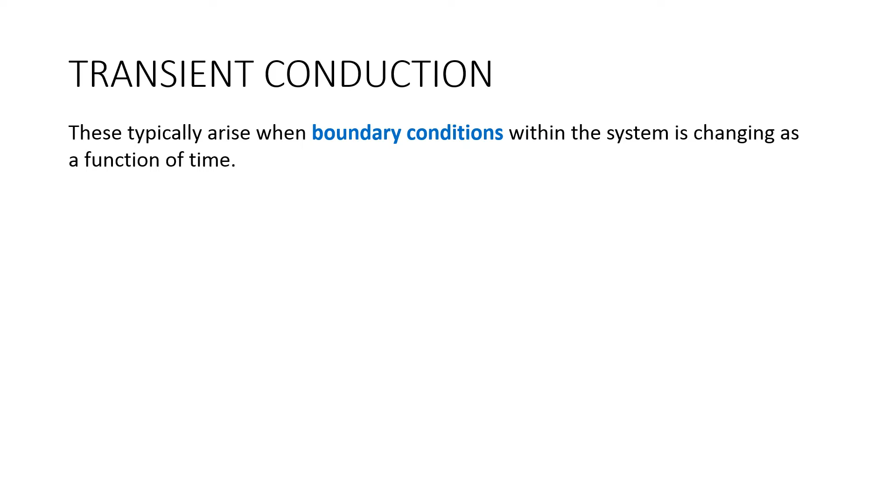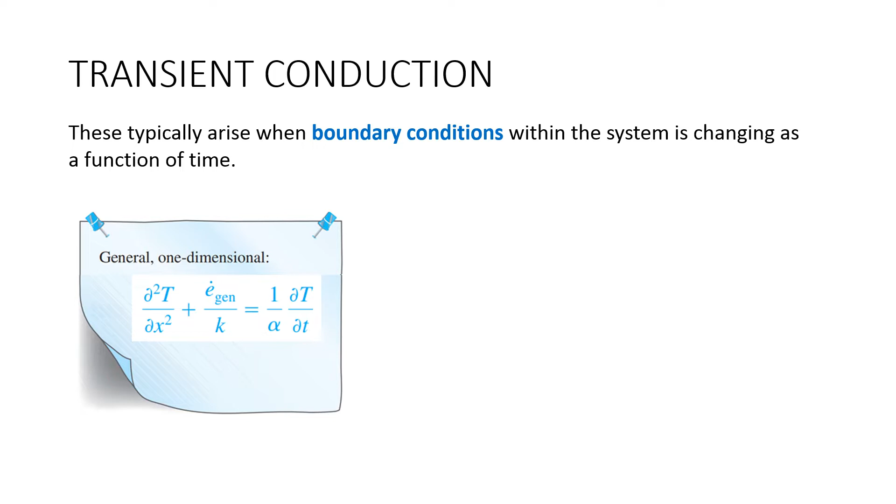In transient heat conduction, time becomes one of the variables in our solution. This typically arises when boundary conditions within the system change as a function of time. This is the heat equation for one-dimensional constant properties. If we could solve this equation, we will get temperature as a function of x and time. But it's rather difficult to solve this equation when time becomes one of the variables.

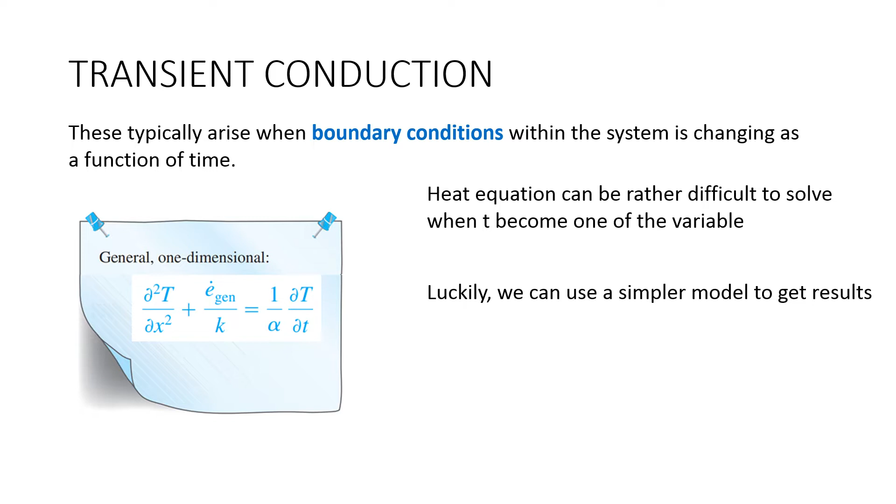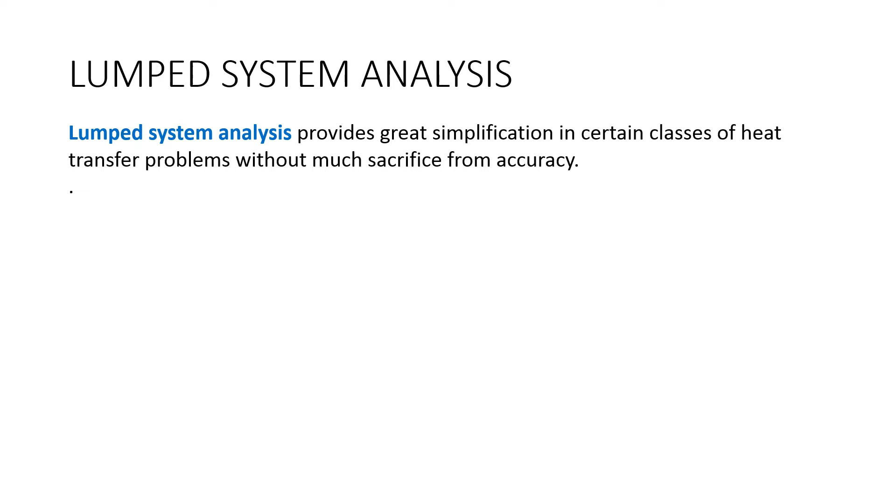Luckily, we have a simpler model to get the same result out of this equation. This is called the lumped heat capacity model. It is used in lumped system analysis, which provides great simplification in certain classes of heat transfer problems without much sacrifice from accuracy.

Now let's consider a body of arbitrary shape of mass m, volume V, surface area A subscript s, density ρ, and specific heat capacity C subscript p, initially at a uniform temperature of T subscript i.

At time t equals 0, the body is placed into a medium at temperature T ambient, and heat transfer takes place between the body and its environment with a heat transfer coefficient h.

For the sake of discussion, we assume that T infinity is greater than Ti, but the analysis is equally valid for the opposite case. We assume lumped system analysis to be applicable so that the temperature remains uniform within the body at all times and changes with only time.

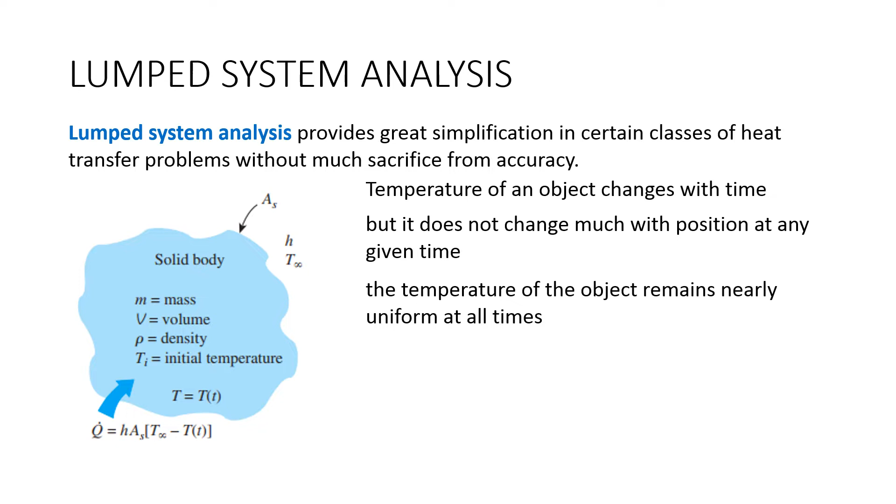So we know that the temperature of the object does not vary at any position, but it only varies with time.

And now we are not going to solve the differential equation, but instead we're going to write the energy balance for the object, which will look like this, as we have learned before in the previous chapter.

So we know that there is no heat transfer out of the body and there is no heat generated within the body.

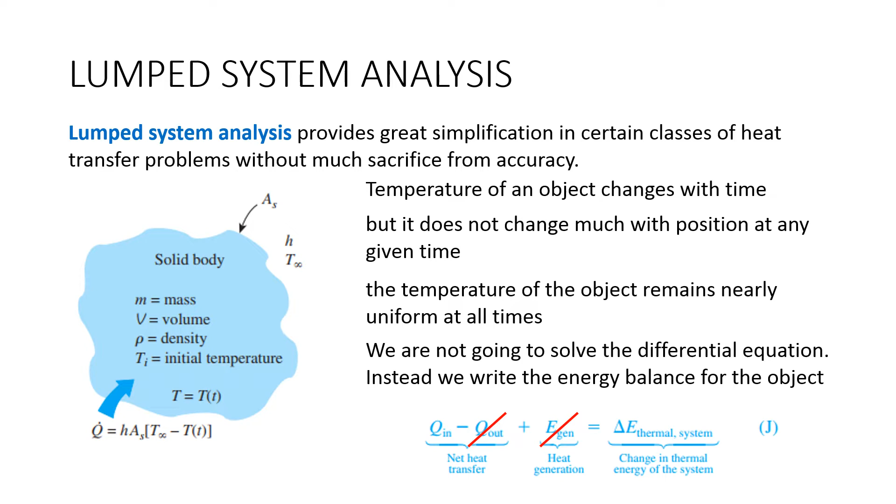So within the differential time interval dt, the temperature of the body rises by a differential amount. The energy balance of the solid for the time interval dt can be expressed as: heat transfer into the body during dt equals the increase in the energy of the body during dt.

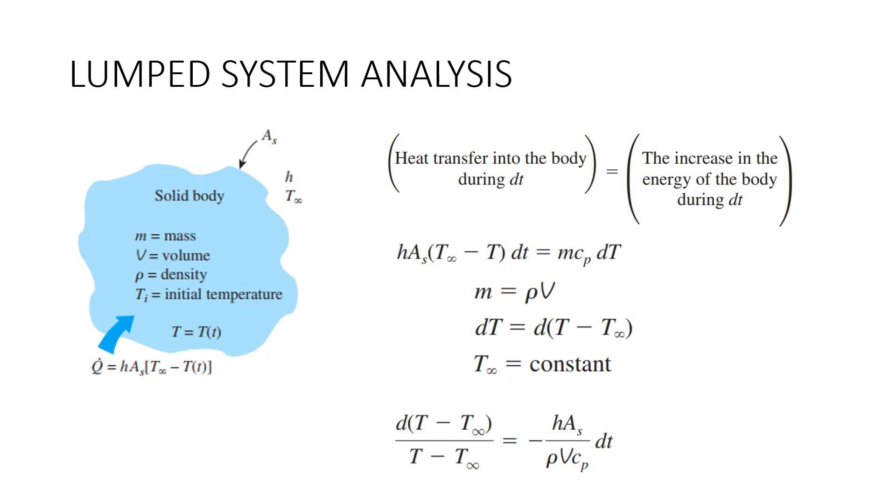In terms of equation: h As (T ambient minus T) dt equals m cp dT. We know that m equals ρV, and dT equals d(T minus T ambient), since T ambient is constant. Now we can rearrange the equation to become like this.

Now, if we integrate this equation from t equals 0, at which T equals Ti, to any time at which T equals Tt, it will give: ln[(Tt minus T ambient)/(Ti minus T ambient)] equals minus hAs/(ρVcp) times t.

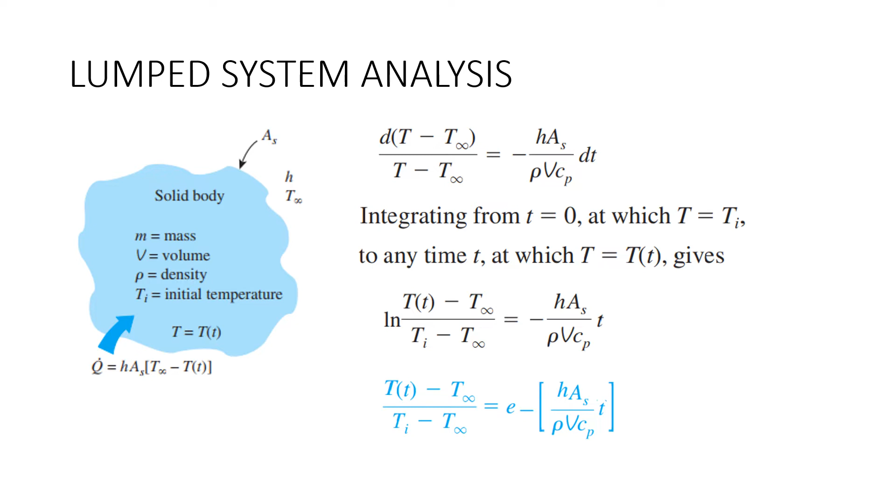Taking the exponential of both sides, we get: (Tt minus T ambient)/(Ti minus T ambient) equals exponential of minus hAs/(ρVcp) times t. And now we have this solution.

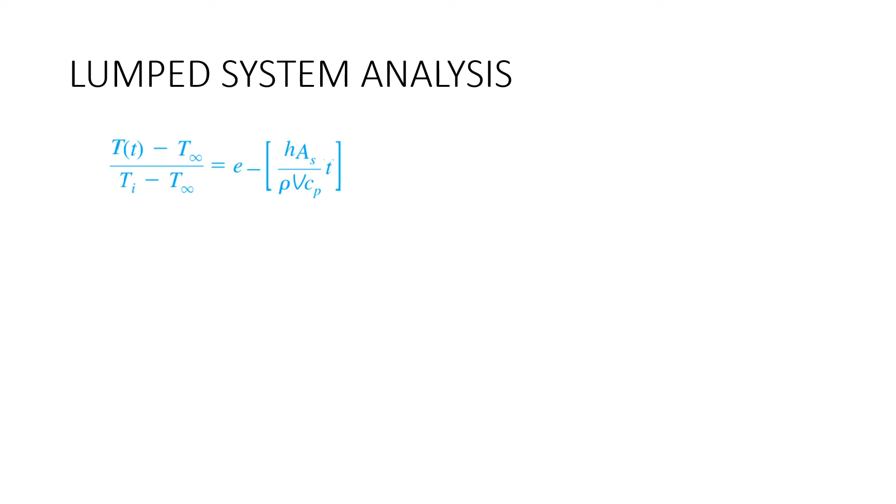What we can learn from this solution is that it enables us to determine the temperature of a body at time t, or alternatively the time t required for the temperature to reach a specified value. The temperature of a body approaches the ambient temperature exponentially.

Once the temperature at time t is available, the rate of convection heat transfer between the body and its environment at that time can be determined from Newton's law of cooling.

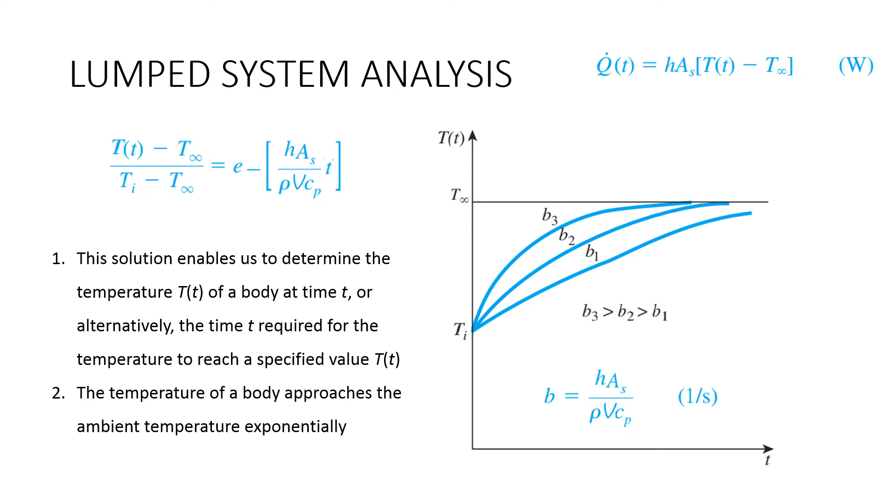The total amount of heat transfer between the body and the surrounding medium over the time interval t equals 0 to t is simply the change in the energy content of the body.

The amount of heat transfer reaches its upper limit when the body reaches the surrounding temperature. Therefore, the maximum heat transfer between the body and its surroundings can be calculated from this equation.

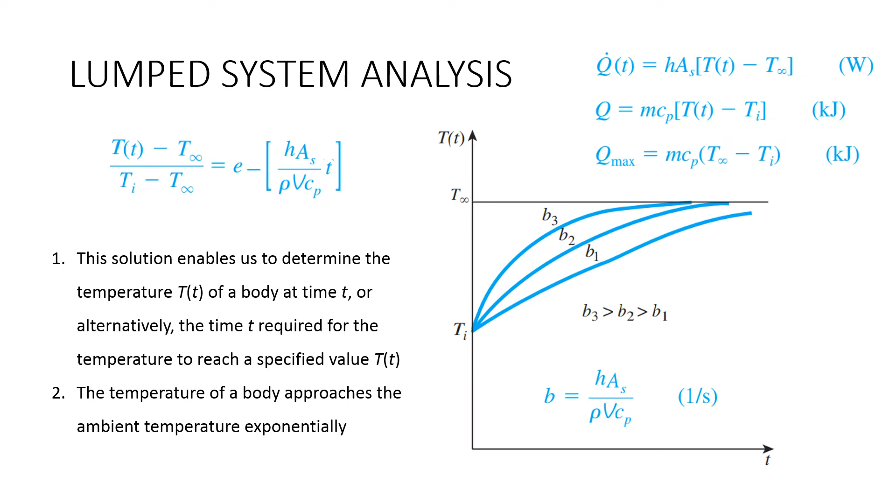However, lumped system analysis is not applicable all of the time. The lumped heat capacity model can only be used when a dimensionless number called the Biot number is less than 0.10.

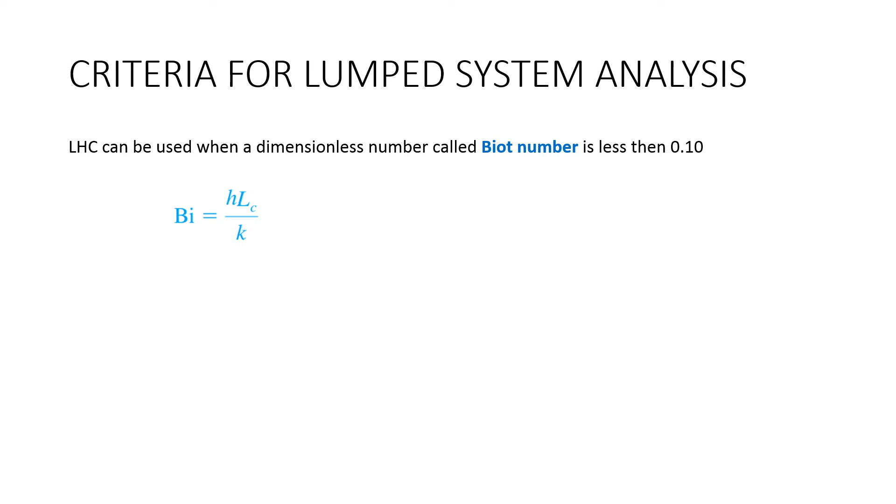The Biot number can be calculated using this equation: Bi equals h Lc over K. H is the heat transfer coefficient, K is the heat conductivity of the object, and Lc is the characteristic length, which can be calculated from V over As.

When a solid body is being heated by a hotter fluid surrounding it, heat is first convected to the body and subsequently conducted within the body. So the Biot number is the ratio of the internal resistance of a body to heat conduction to its external resistance to heat convection.

Therefore, a small Biot number represents small resistance to heat conduction, and thus small temperature gradients within the body.

Lumped system analysis assumes a uniform temperature distribution throughout the body, which is the case only when the thermal resistance of the body to heat conduction is equal to 0. Thus, lumped system analysis is exact when Biot number equals 0, and approximate when Biot number is greater than 0. Of course, the smaller the Biot number, the more accurate the lumped system analysis.

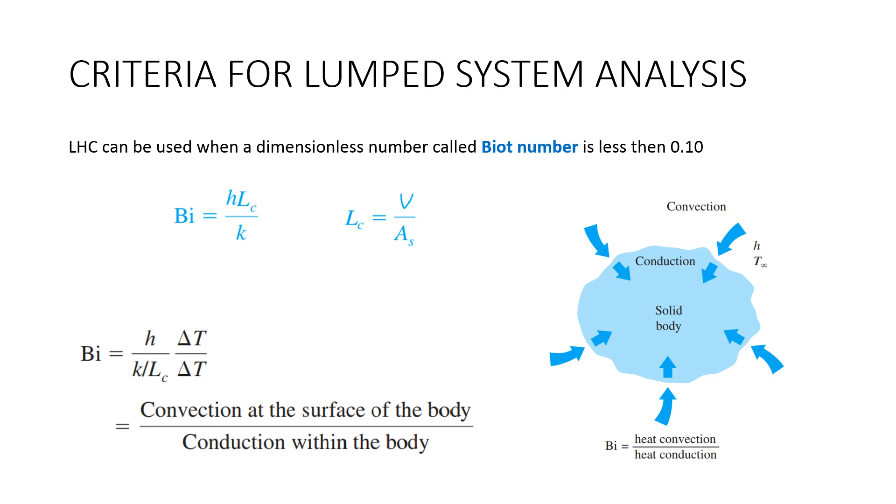Now let's look into this example. Metal plates with a thickness of 2 cm exiting an oven are conveyed through a 10-meter long cooling chamber at a speed of 4 cm per second.

The plates enter the cooling chamber at an initial temperature of 700 degrees C. The air temperature in the cooling chamber is 15 degrees C, and the plates are cooled with blowing air. The convection heat transfer coefficient is given as a function of the air velocity, H equal 33 V power of 0.8, where H is in watt per meter squared Kelvin and V is in meter per second.

To prevent any incident of thermal burn, it is necessary to design the cooling process such that the plates exit the cooling chamber at a relatively safe temperature of 50 degrees C or less.

Evaluate whether this case can be solved using a lumped system or not, if the temperature of the plates exiting the cooling chamber is at 50 degrees C. In this example, the properties of the metal plates is also given.

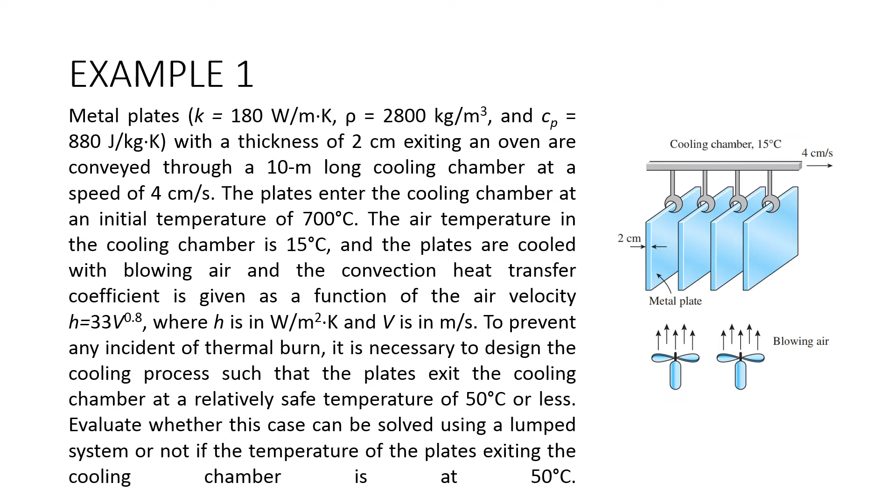Before we can solve this problem, there are a few important assumptions. Number one, the thermal properties of metal plates are assumed to be constant. Convection heat transfer coefficient is uniform and heat transfer by radiation is negligible.

So in order to know whether this case can be solved using the lumped heat capacity model or not, we have to calculate the Biot number and make sure that the Biot number is less than 0.1. We know that Biot number equals H, the convection heat transfer coefficient, multiplied by LC over conductivity of the metal plate.

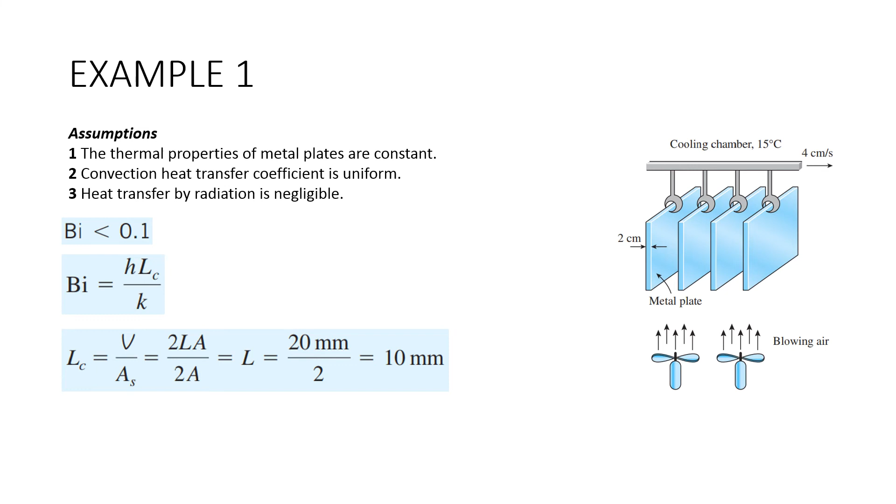The characteristic length LC can be calculated using LC equal V over AS, and we can calculate LC using the information given in the question. We will get L subscript C, the characteristic length of this metal plate, equal to 10 millimeters.

And then we also have to know - we have the value of K, but we don't have the value of H. The K conductivity is given in the question, but H is given as a function of velocity, the air velocity, which equals 33 V power of 0.8. But we don't know the velocity of air. So what we have to do now is calculate the velocity of air.

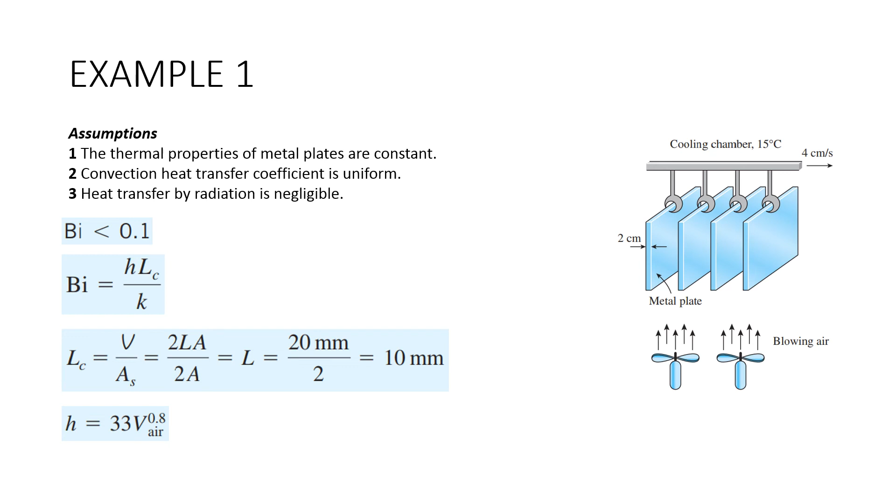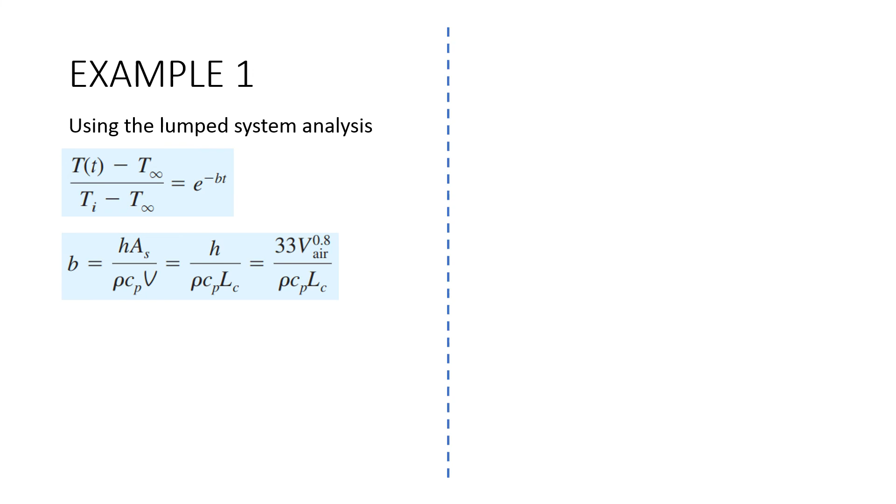Using the lumped system analysis, we know this equation, and from this equation, we know that B is equal to H times AS over rho Cp V. We can rearrange this equation: B equal H over rho Cp LC. Or in other words, B is equal 33 V air power of 0.8 over rho Cp LC.

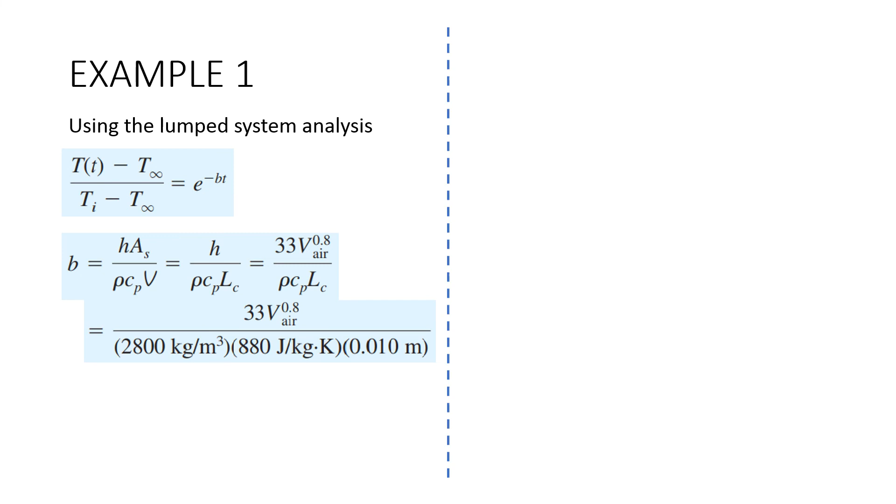If we plug in all the information that we got from the question, we will get this equation. But we still have not solved for the velocity of air yet. So the duration of cooling can be determined from the cooling chamber length and the speed of the plates. So T equal 10 meter over 0.04 meter per second, which equals 250 seconds.

And we know that B is equal minus 1 over T, ln of T minus T ambient over Ti minus T ambient. We know Tt, we know Ti, and also we know T ambient, and we just calculated T. So we can calculate the value of B using those values, and we will get B is equal 0.0119 per second.

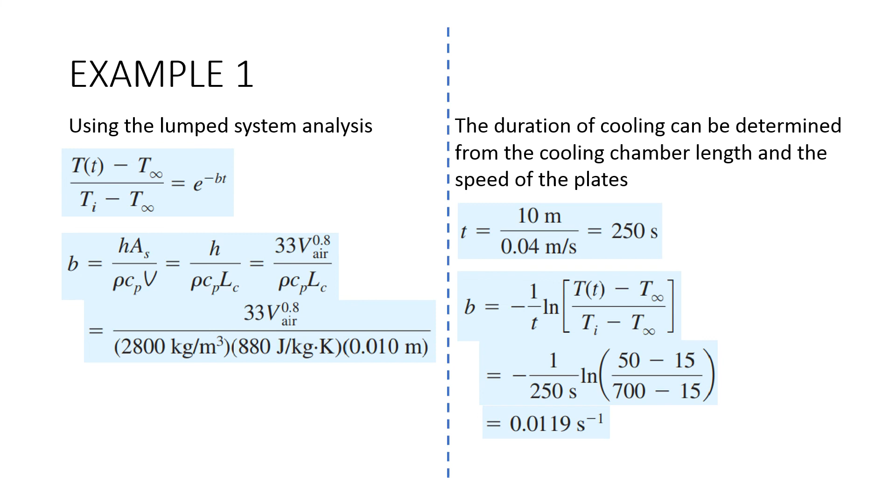Now, the air velocity and convection heat transfer coefficient is necessary to cool the plates to 50 degrees C as they exit the cooling chamber. So we know that B is equal 33 V air power of 0.8 over rho Cp LC, which equals 0.01195 per second.

And we can solve for V air using this equation. We just rearrange the equation to get V air equal 15.3 meter per second. And now we can solve H equal 33 V air power of 0.8, and we have the value of V air. We just plug it in inside this equation and we will get H equal 293 watt per meter squared Kelvin.

Now we can calculate Biot number. Biot number is equal H LC over K. So we got H, we got LC, and we got K. We can calculate the Biot number, which will give the answer of 0.0163, which of course is less than 0.1.

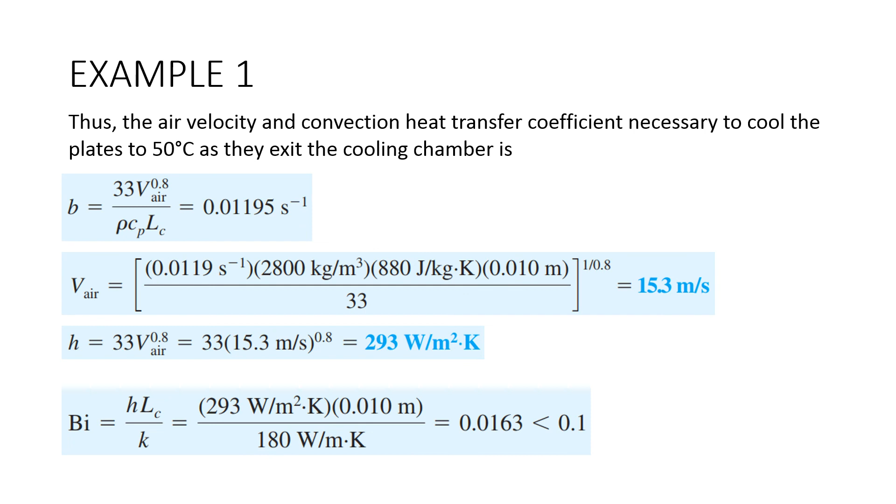So in conclusion, Biot number is less than 0.1 for this case, which means that we can use lumped system analysis to solve this problem.